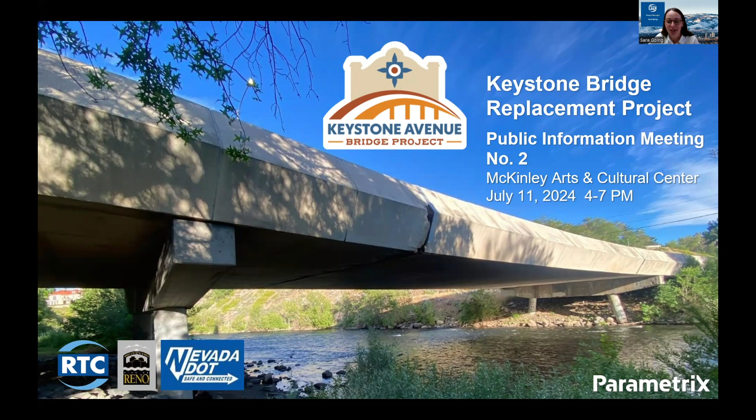The purpose of this meeting is to share the project status with the public, as well as review how we integrated the feedback from our last public meeting in December into the project alternatives. We're also going to review the proposed alternatives moving forward, discuss next steps for the project, and check in with the public to get your valuable feedback on how our project is shaping up.

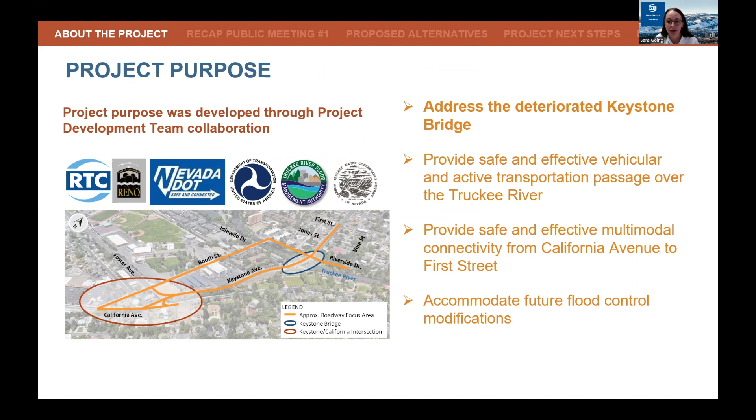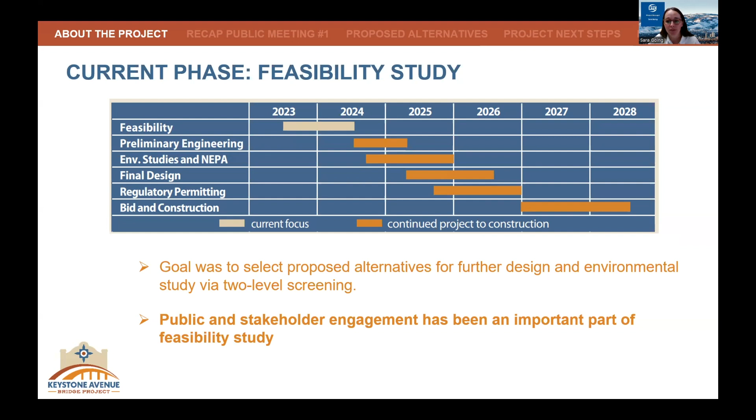The purpose of this project is to address the deteriorating Keystone Avenue Bridge over the Truckee River, as well as address multimodal circulation in the bridge corridor. We're currently performing a feasibility study for the project, which is the first step as we work towards construction as soon as 2027. The feasibility study's goal is to narrow down and select feasible proposed alternatives for further design and environmental study.

This is our second public meeting for the project. Our first meeting was back in December, where we took your feedback from the level 1 screening and integrated it into the concepts for the level 2 screening. In this meeting, we will share the recommendations from that screening as we look towards wrapping up the feasibility study this summer. Let's recap the first public meeting and the great feedback that was provided to our team.

The first screening involved two subject areas. The first was the Keystone multimodal configuration over the Truckee River, and that level 1 screening resulted in 3 alternatives for crossing the Truckee River.

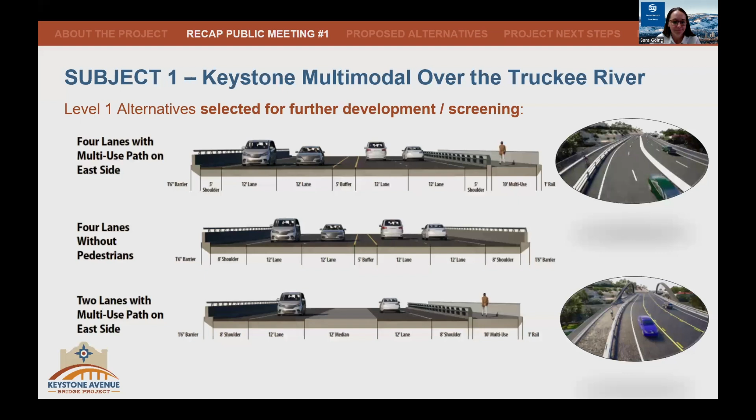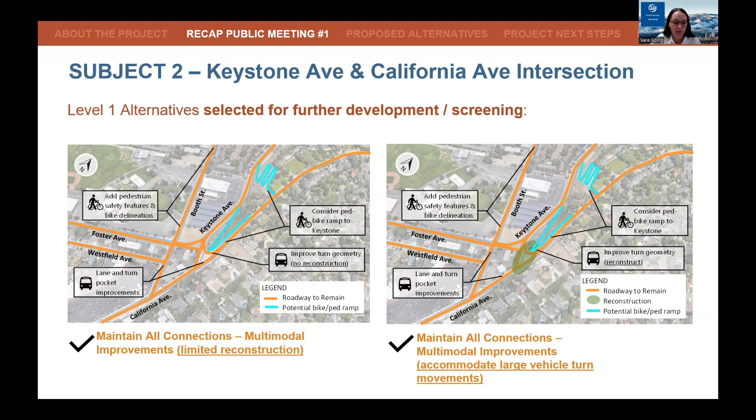The second subject was at the Keystone Avenue and California Avenue intersection, and the feedback from that first level of screening was that we needed to make multimodal improvements at the intersection, as well as make more consideration for accommodating large vehicle movements. We asked a few questions to the public, and we really appreciate those of you who provided us feedback.

One of the questions we asked was whether the public had any safety concerns in the project area, and the responses we received were about general pedestrian and bicycle safety, lack of pedestrian and bicycle facilities on the Keystone Bridge, the turn from California Avenue onto Keystone Avenue, traffic speeds on Keystone over the bridge, and pedestrian safety at the Keystone and Jones intersection.

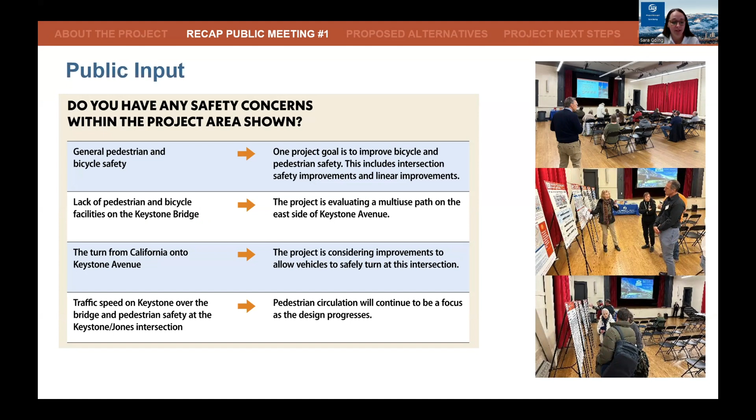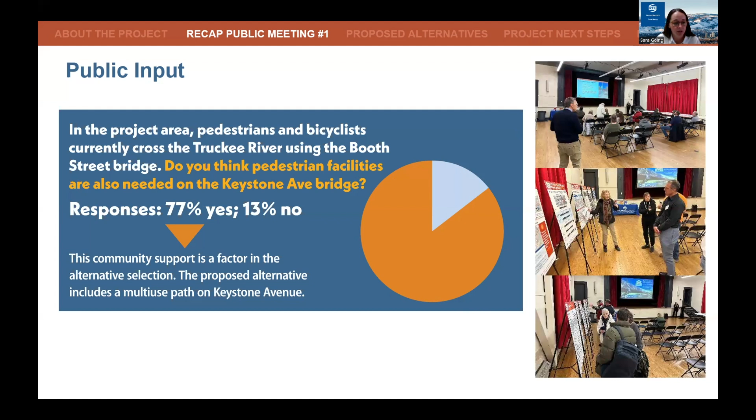We also asked whether pedestrian facilities were needed on both the Booth Street Bridge and the Keystone Avenue Bridge, and the public said overwhelmingly, 77% yes, they would like to have pedestrian facilities on the Keystone Avenue Bridge. That's why the proposed alternative does include a multi-use path on Keystone Avenue.

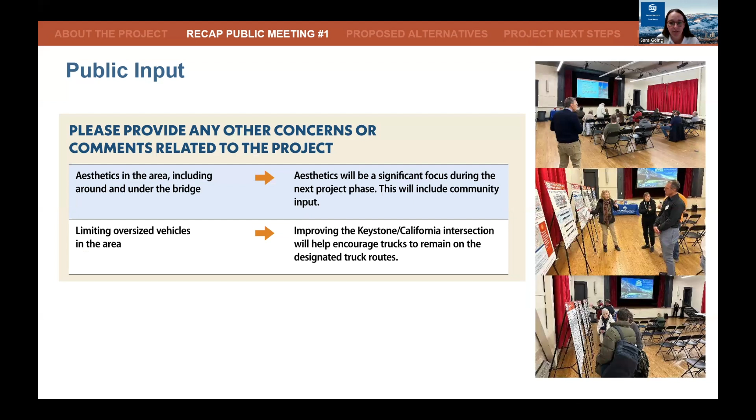Other comments we received were regarding aesthetics and, again, oversized vehicles. Aesthetics will be a focus during the next project phase, certainly with opportunity for guidance and input by the public. Trucks and large vehicle movements through the area were also a recurring theme in the comments, and that was particularly relevant to screening the alternatives for the Keystone and California intersection.

At that intersection, other concerns were pedestrian and bicycle safety, as well as continuous and protected infrastructure for these modes. Truck and bus movements are also a known problem in the intersection. Both Keystone and California Avenue are designated truck routes, so making the turn movement improvements at this intersection will help keep those trucks off the surrounding neighborhood streets, which was a concern by the surrounding neighbors.

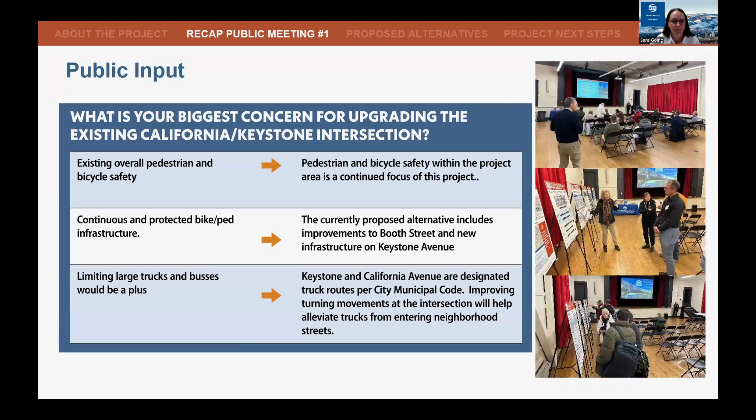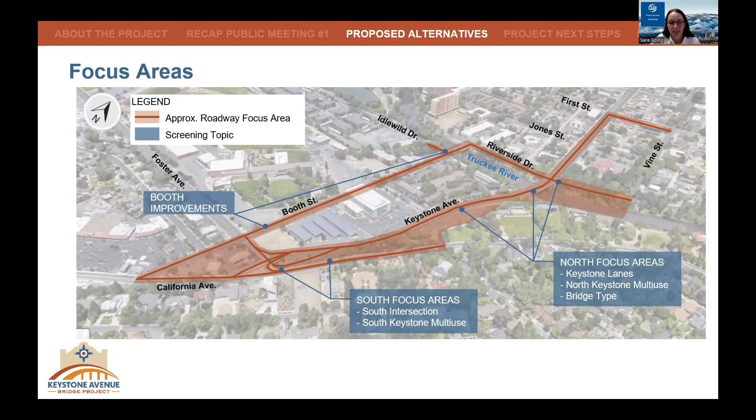All of that feedback was integrated into the level 2 screening, which resulted in proposed alternatives for each focus area. Similar to the level 1 screening, the concepts were further developed in north and south focus areas. The south focus area included the south intersection at Keystone and California and the southern connection of the Keystone multi-use path. The north focus area included the lane configuration on the Keystone Bridge, the north connection of the multi-use path, and the bridge structure type itself. Based on public input, a focus area was also added for multimodal improvements to the Booth Street corridor.

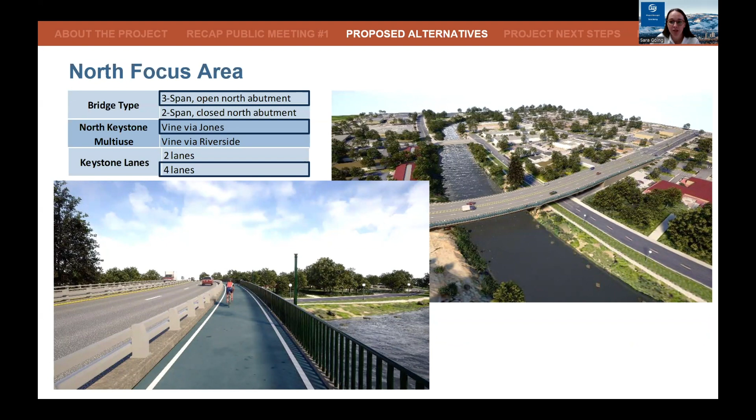The North Focus area proposes to utilize a 3-span bridge with an open abutment area. The Keystone multi-use path is proposed to connect to Vine Street via Jones Street, and the bridge is proposed to have 4 vehicle lanes. For the South Focus area, feedback from the first public meeting really emphasized the difficulty of large vehicle movements at this intersection.

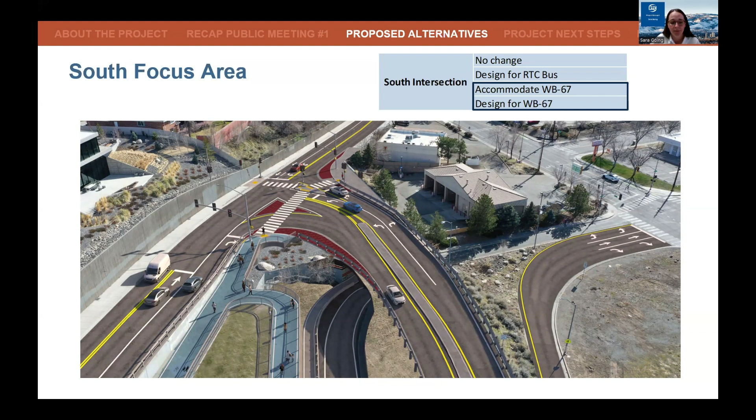Further design is going to focus on improving those movements as well as improving movements and safety for people walking and biking. Multimodal improvements are also proposed on Booth Street, and that could be either a shared use path or a 2-way cycle track.

Next steps for the project team are to move forward with our geotechnical exploration late this summer. We're also looking to move this project into preliminary engineering or preliminary design and begin our environmental studies for compliance with the National Environmental Policy Act, otherwise known as NEPA. Your comments from this public meeting will be integrated into the proposed alternatives that move forward into that preliminary engineering effort. Community engagement will continue as this project progresses towards that construction date out in 2027.

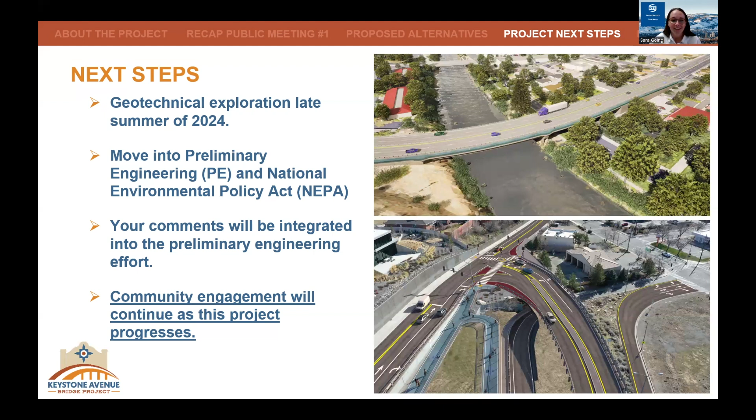Some things we're specifically looking for feedback on at this stage, and you can provide that feedback over at keystonebridgeproject.com. A few of those questions are: do you support the proposed alternatives as we're showing them here today? What aesthetic features are important to you both on top and underneath the bridge?

We recognize that the Keystone Bridge replacement is going to require lane closures during construction. We want to know if the public will support a full closure of Keystone Avenue over the river in order to significantly reduce the duration and cost of that construction. We also want to know if you have any general feedback regarding the project or if there are any other focus areas we should be looking at as we move into preliminary design.